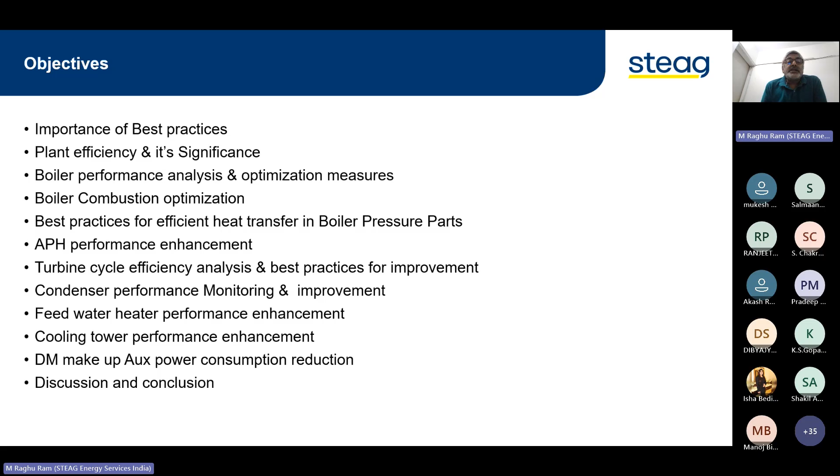So these are the main components identified for the efficiency of the power plant. So I'll take you through one by one. First, let us introduce ourselves to why we need a best practice in a power plant. You know, power plant, as already I told, is a complex system and very costly assets in the power plant.

And without having best efficiency out of each and every equipment, we will not be cost competitive. You know what is the present per megawatt installation cost? It's running around 9 crores per megawatt for a conventional thermal power plant of supercritical, ultra supercritical units. So you can imagine the fixed cost, and then the coal is also very costly.

Once we combine these two, the energy charge rate will be very high, and then even fixed cost will be very high. Unless we are cost competitive, we cannot stand in the market. The days are going to come in India where each consumer, like you and me, can source our power from the cheapest source from anywhere in any corner of India.

So that type of market is emerging slowly and slowly. So we need to be cost competitive. Otherwise, we cannot stand in the market. So this is one of the reasons to be best - cost competitiveness.

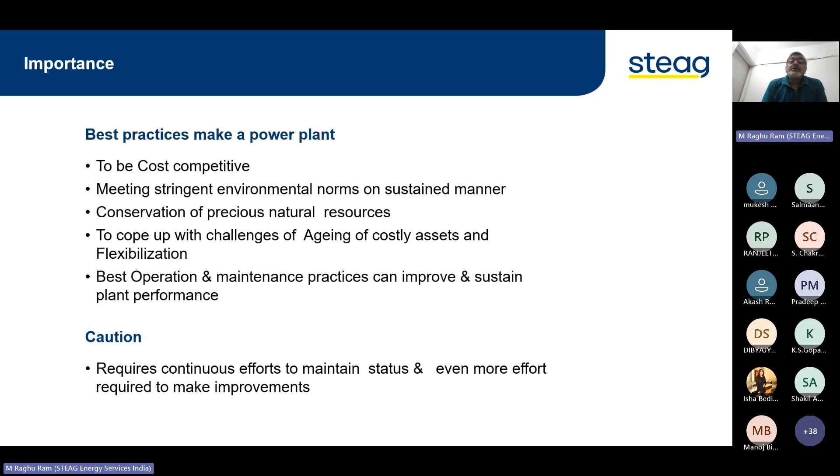What is efficiency? You all know from childhood, we are reading it is output by input. How much output we are getting for the given input.

In the power plant context, heat rate is the more predominant indicator of power plant efficiency. It is nothing but heat required in kilocalories or kilojoules to generate a kilowatt hour of power, that is, 1 unit of power. It is expressed as kilocalories per kilowatt hour or kilojoules per kilowatt hour. This is the most representative parameter of power plant efficiency.

Unit heat rate is heat input to the cycle in kilocalories, that is, fuel burned - kg of fuel burned into calorific value of the fuel - divided by power generated in kilowatt hour. This is the unit heat rate. Fuel is input at the boiler, power output is at the generator, and the entire cycle is covered.

Coming to turbine cycle heat rate, gross turbine cycle heat rate is the heat input of the turbine cycle - that is, through main steam and hot reheat, how much heat is input - and then what is the power generated at generator terminals.

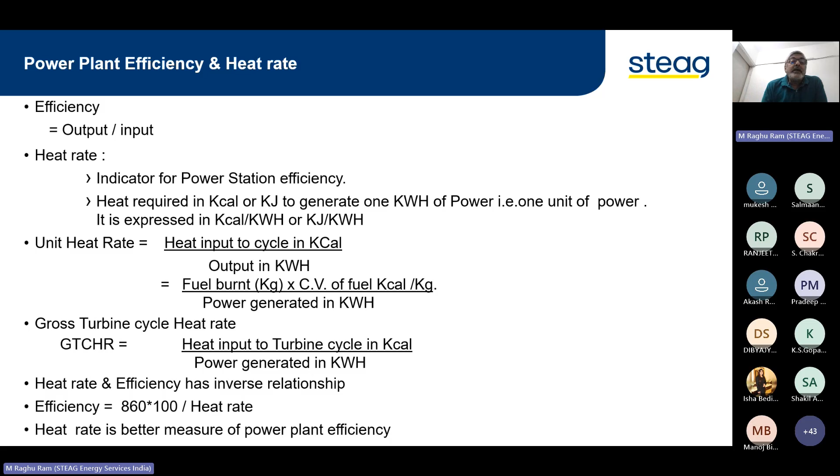Factors affecting the heat rate and efficiency of the unit include basic design aspects. It is a design feature - how the plant is designed, what parameters are set.

Take a normal conventional subcritical boiler versus supercritical technology - there is a vast difference in heat rates and efficiencies. Higher the pressure and temperature, the more efficiency we get. Nowadays materials are available so people are touching 600 plus degrees, and pressures around 285. So the design aspect also decides the basic heat rate of the power plants.

Then machine rating, as I already covered. Ambient conditions - under what conditions the plant is operating, very hot or very cold conditions, and relative humidity - these also have an influence on the efficiency or heat rate of the power plant.

Condenser vacuum and partial loading - definitely with partial loading there will be heat rate deviation, because units are designed for base load. Once you go for partial load operation, there will be deviation in the heat rate. I'm not going into the details of compensations, but partial load operation has a bearing on efficiency.

Coal quality has a direct bearing on boiler efficiency. Aging of the turbine, aging of the components. Chemistry also affects heat transfer, either in the condenser, boiler, or other heat transfer components. Chemistry has a bearing.

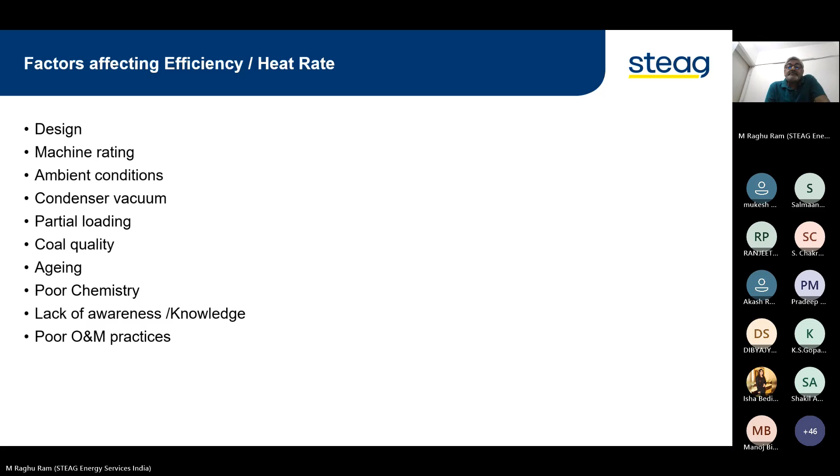Now, any parameter has to have a comparison for evaluation or gap analysis, whatever you say. So what reference values can we take for the gap analysis or comparison purpose? Either it can be design parameters or performance guarantee test parameters.

Of course, design parameters - certain parameters can be achieved, but certain ambient conditions we don't have any control over. So achieving design parameters may be a difficult task, but the best thing would be the parameters and performance achieved in the PG test. PG test is conducted in a controlled environment.

I think you must be knowing, because we do the cycle isolation, there will not be any makeup, there will not be any soot blowing. Soot blowing is done 2 to 4 hours prior to the efficiency testing. Then there will not be any de-ashing during this. So the cycle is completely isolated, and performance test is conducted.

These results, the PG test results, can be used as a comparison for the gap analysis purpose. And one more important thing for the gap analysis and awareness is the plant personnel should have the impact of deviation in the financial terms.

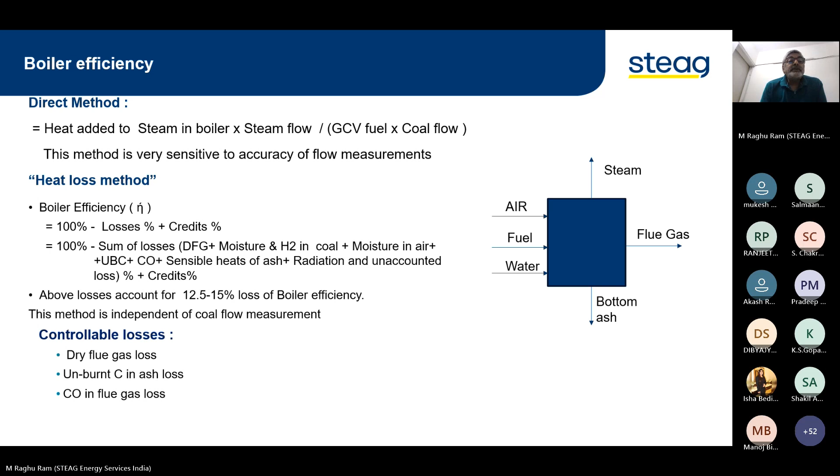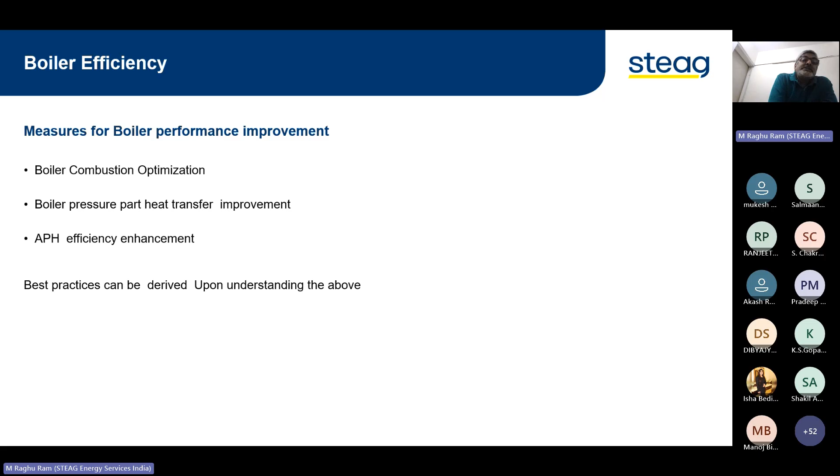Now, what are the measures we can adopt for efficiency enhancement? One is boiler combustion optimization, boiler pressure part heat transfer improvement, and air preheater efficiency enhancement. All the factors I was discussing about controllable losses are covered under these three major components.

Now, what is the calorific value? Just a few words on this. Calorific value is the heat content per unit of coal, expressed as kilocalories per kg or kilojoules per kg. Coal is a complex compound - once you burn it, it has carbon, volatile matter, moisture, and ash. Once we burn it, it releases heat, and that heat is called calorific value.

You have GCV or HHV - there are two ways we can express them. GCV, or higher heat value, gross calorific value, is the total amount of heat produced when a fuel is completely burned and the combustion products are cooled to the initial temperature of the fuel.

It means the moisture inside the coal gets evaporated, absorbing the latent heat for evaporation, and that heat is released to the net heat. Then the product is cooled and water is condensed - that is called GCV, the total higher amount of heat available for use. Whereas in low heat value, the water vapor produced during combustion is not condensed, so latent heat is lost. That is the lower heat value.

So calorific value is a necessary basic measurement for boiler efficiency calculation, and it is also required for fuel payments, coal payments - all coal payments are done based on this. You must be aware that coal is divided into several grades, G1 up to G17 in the Indian context. Bituminous and anthracite coals are all divided into G7 up to G17 grades. So the payment to coal companies depends upon the GCV of the coal.

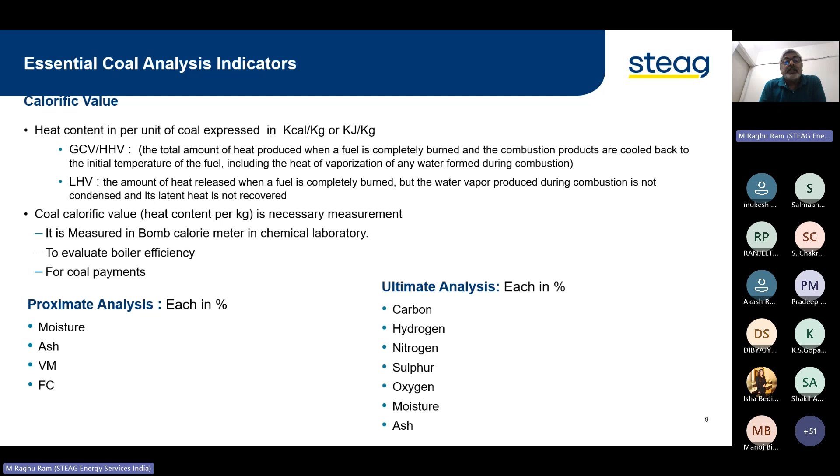But for PG test purposes - I'm repeating this, for PG test purposes - proximate analysis, the moisture, can be done in our laboratory with both parties agreeing, but ultimate analysis is done in an accredited third party laboratory to have independence, because it has a contractual obligation. It is not done through a formula. For regular, day-to-day analysis purposes, we can use that formula, which can be used for trending purposes.

So, influence of various components in boiler combustion. Volatile matter - what is its influence on combustion? The volatile matter actually limits the pulverizer outlet temperature and fineness requirement. Normally we pulverize the coal in the pulverizer, preheat this fuel and send it to the boiler. For general subbituminous coals, we keep around 80-85 degrees centigrade if VM is low. If VM is high, there is a limitation on the mill outlet temperature - it may be around 65 degrees centigrade only.

Similarly, volatile matter has influence on burner and air damper settings, ignition for combustion, and flame stability. High VM coals will have higher flame stability. Low VM coals have chances of flame failures and furnace trippings, because low VM has got low sustenance on combustion.

Then there's unburnt carbon content in fly ash, and moisture has an influence. Each moisture has two types: one is surface moisture, the external moisture in the capillaries of the coal particle, which can be easily taken out during heating. But inherent moisture is in a compounded form, which will not come out due to heating - it has to be burnt out. So these are the two types of moisture.

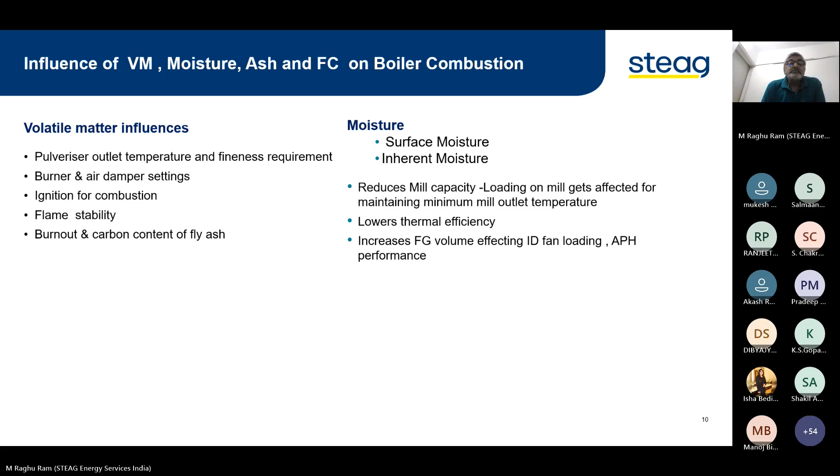Now, influence of ash. Ash is a waste product, but not in that context—ash nowadays has got a lot of uses. I'm not talking about that context; I am talking about the combustion part of it. So ash doesn't burn. Ash is the incombustible residue of combustion.

So it is a burden for us, because Indian coal has got around 40 to 44% ash. Suppose any power plant gets 10 rakes of coal, you can imagine you are carrying ash in 4 to 4.4 rakes, since it's about 40%.

So this much ash we are transporting from the mines, bringing it here, handling it, loading into the boiler, burning the coal, and then that ash comes out and we have to dispose of it. This is a sort of pain for power plant operators, because ash disposal and ash utilization is one of our prime responsibilities.

The polluter will pay—that is the motto now. We are the polluters, we have to pay for that. That means it has to be utilized, either in mines backfilling, road construction, brick manufacturing, gypsum, or various other utilities. Mines backfilling is also a use for it.

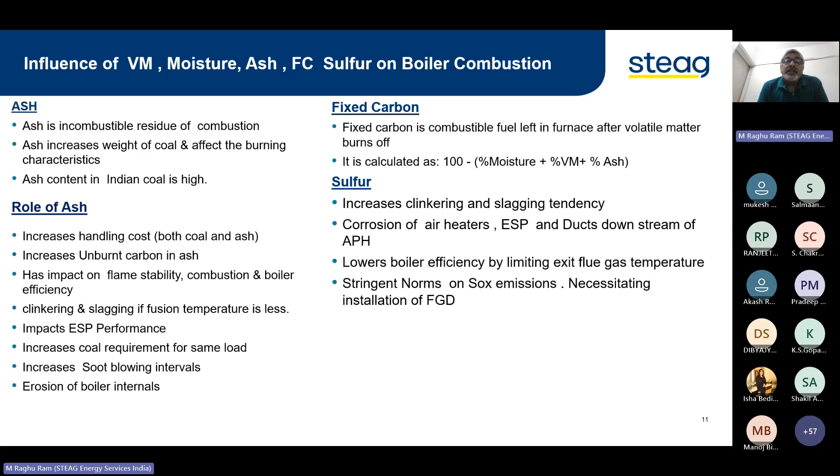Now I'll get back to the discussion. We were talking about combustion optimization and combustion efficiency. There are three major factors, the three T's of combustion: temperature, turbulence, and time. Let me spend some time on this.

Temperature is the temperature at which fuel enters the boiler, and it has to reach its self-ignition temperature to catch fire and release heat. This aids in self-sustenance of combustion. What we do is pulverize coal, remove the moisture, and carry this preheated coal to the burner, where it sprays into the furnace.

Flame is already available there. The coal particle gets heated up to ignition temperature. Meanwhile, volatile matter burns, giving further heat, and the coal particle catches fire and starts burning, cooling off after completion of combustion. This is the temperature of the fuel entering the boiler, the ignition temperature. Then comes turbulence.

Each coal particle, after catching fire, has its surface covered with products of combustion. These products of combustion cool off or prevent fresh particle exposure to the flame. So bad combustion takes place, and we lose unburned carbon in the bottom ash and fly ash.

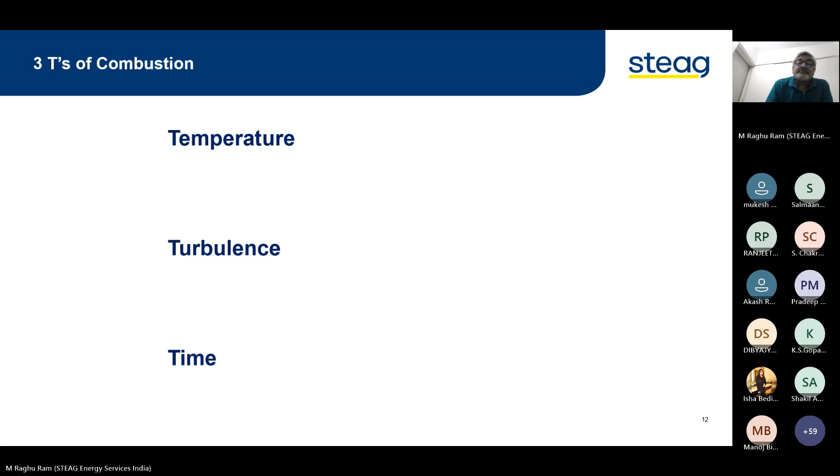I'll just touch upon the coal burning profile. It shows the temperature at which volatile ignition sets in, the combustion of volatile matter. As I told you, once coal plus air enters the furnace around 85 to 90 degrees centigrade, depending on conditions, it starts picking up heat inside the furnace for the prevailing flame conditions, and the temperature reaches over 200.

Then it starts burning, which is called combustion of volatile matter setting in. Next is the ignition temperature, where ignition of char takes place, meaning coal particles start burning. PT is the peak temperature where the rate of heat release is maximum due to char combustion.

BT is the burnout temperature, where burning of coal is complete and exothermic heat release becomes zero, meaning nothing is left in the char particle. These temperatures give an indication of possible delayed combustion. If you see this profile, it will indicate the possible delayed combustion behavior of the type of coal. This is a very important aspect to consider.

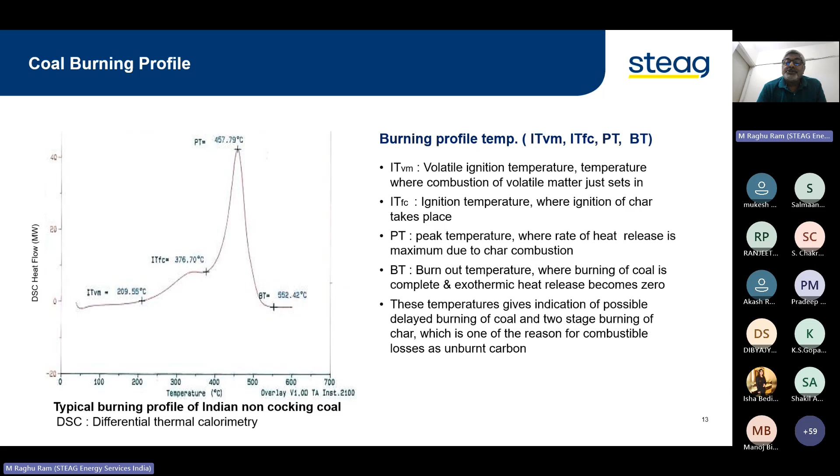If you want to use a boiler with different types of coal together, you don't have much choice unless the burning profiles are almost similar. These profiles have to be compared, and then the coal can be used as a blended product.

So these things are important: the profile has to be understood and analyzed. Different coals having similar profiles will be best compatible for blending purposes.

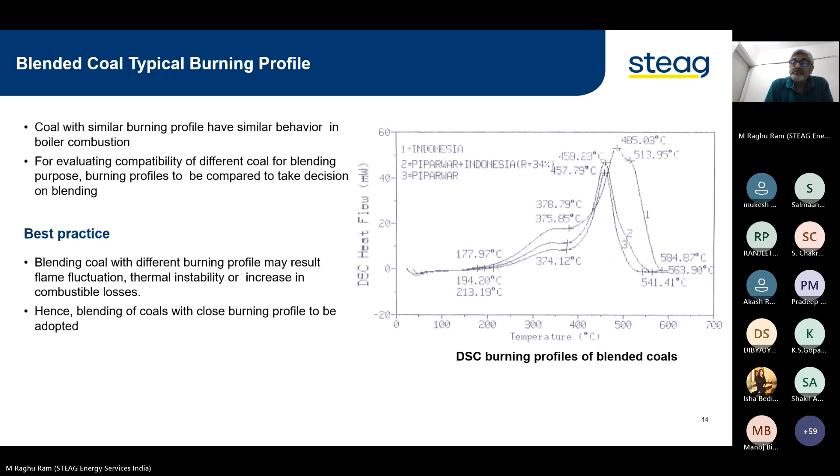So my entire discussion on combustion optimization revolves around three components: time, turbulence, and temperature. These three components we will be concentrating on in one form or other. So what is the influence of coal fineness on combustion optimization?

And higher combustion efficiency we can achieve because particle size is so small that it burns rapidly and completely, so we can reduce the unburnt carbon in ash.

Then higher heat release per unit mass, fast response to load changes, because pulverized fuel boilers compared to- I can just touch upon the CFBC boiler here. The CFBC boiler response time for load fluctuation is a little slow compared to pulverized fuel boilers. No doubt, CFBC may have better stability under similar conditions, but for load response, the ramp rates, it is very difficult to achieve the nowadays recommended 2 to 3% ramp rate in a CFBC boiler because of the intense heat stored in the refractories and the bed material. The response is very slow. But in pulverized fuel boilers, it is faster.

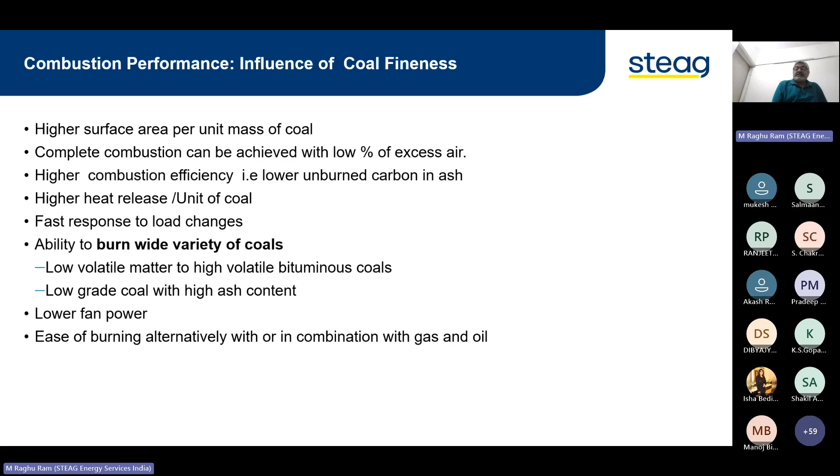It can be easily burnt because of pulverization, along with oil or gas, in combination with oil and gas.

Then we must be talking about excess air, stoichiometric air. We will touch upon these two aspects. The theoretical air required for complete combustion of fuel is stoichiometric air. The stoichiometric air allows the complete combustion of the fuel particle.

However, for complete combustion, we may have to require a little more air because of the prevailing conditions and different deviations in the boiler. So complete combustion avoids carbon conversion to carbon monoxide- it will not allow the formation of carbon monoxide, and hydrogen converts to water. The theoretical equation shows 2.67 kg of carbon plus 8 kg of hydrogen and 1 kg of sulfur and the oxygen available in the fuel.

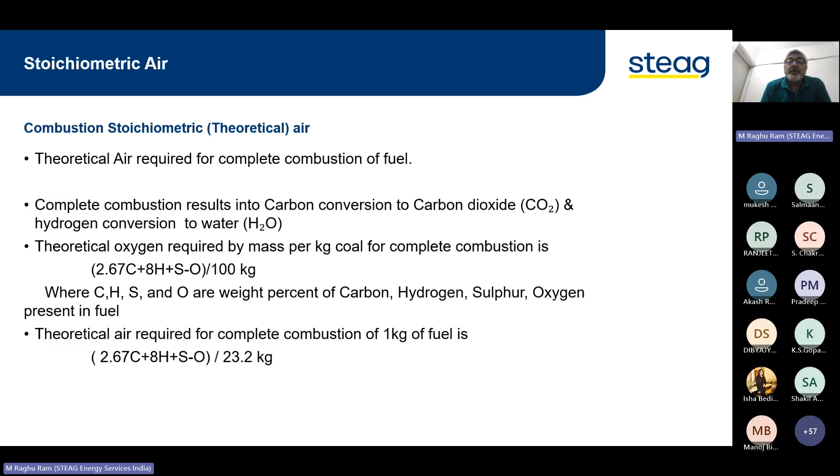This is the stoichiometric airflow equation. Theoretical air required will be- because oxygen by weight is 23.2% in the air, so the theoretical requirement is divided by 23.2. Stoichiometric air is required for complete combustion.

However, under practical situations, additional air is required for completing the combustion, because of reasons like lack of perfect mixing between fuel and air, fluctuations in fuel flow- since coal plus air is not a homogeneous mixture going through the coal pipes, it is a heterogeneous mixture, so there could be some variation in fuel flow and variation in calorific value of coal. Nowadays we say this particular mine has this calorific value, but each bed has got a different calorific value, so there will be changes in calorific value because of its heterogeneity.

And one aspect I would like to stress is, as per classical thermodynamics- Van Wylen, you can refer to that textbook, Classical Thermodynamics by Van Wylen. In that book, the combustion equations are elaborately discussed, along with the stoichiometric air requirement and excess air requirement, and the influence of excess air requirement is elaborately discussed.

If we burn fuel with the correct stoichiometric ratio under very controlled conditions, the temperatures achieved are very, very high compared to what we achieve in the boiler.

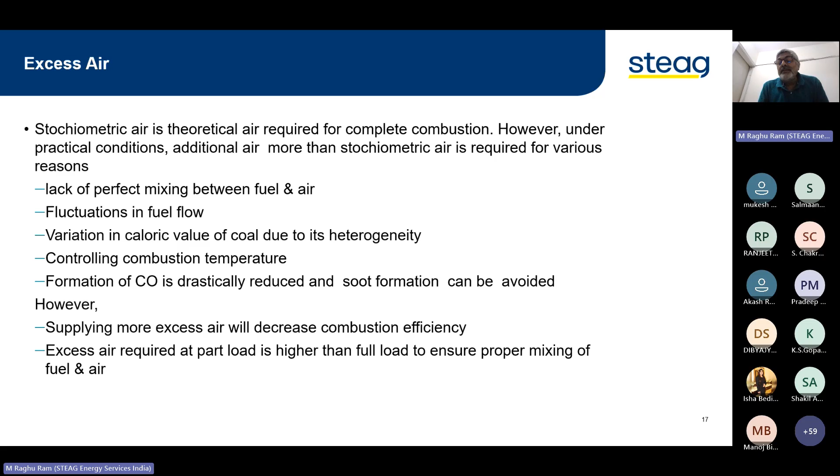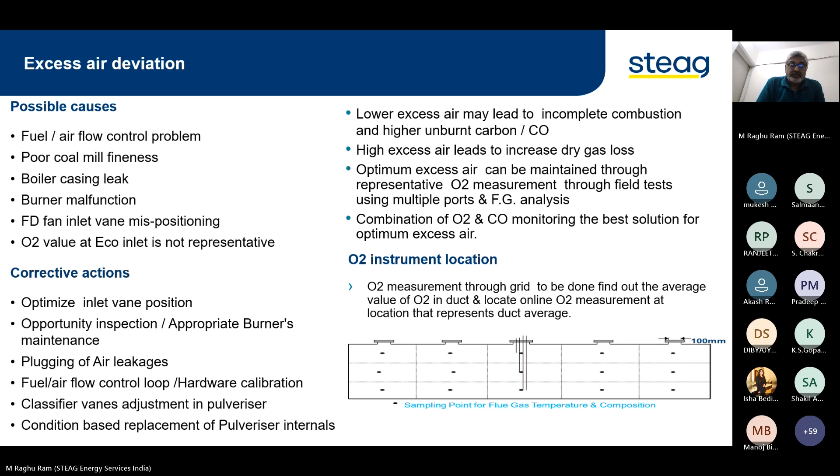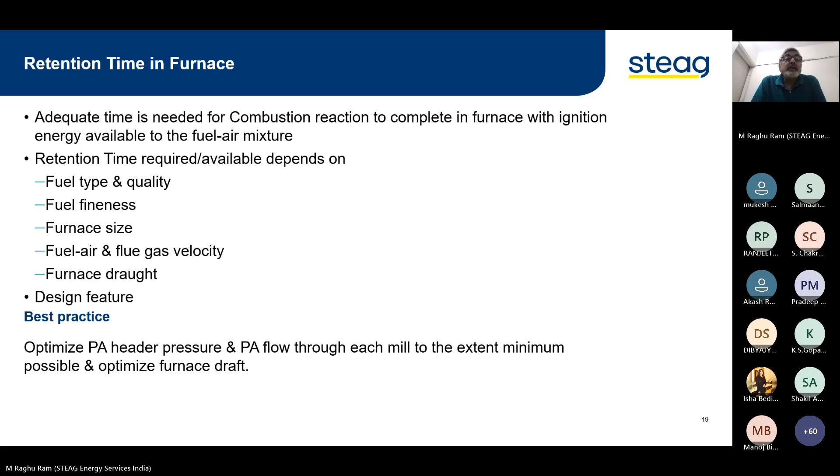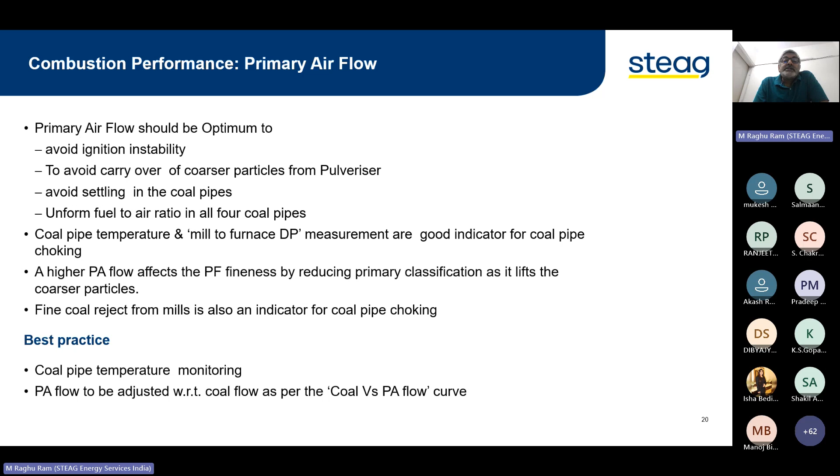PA flow to be adjusted, coal flow as per the coal versus PA flow curve. This is a manufacturer's curve. According to that, we need to adjust the PA flow.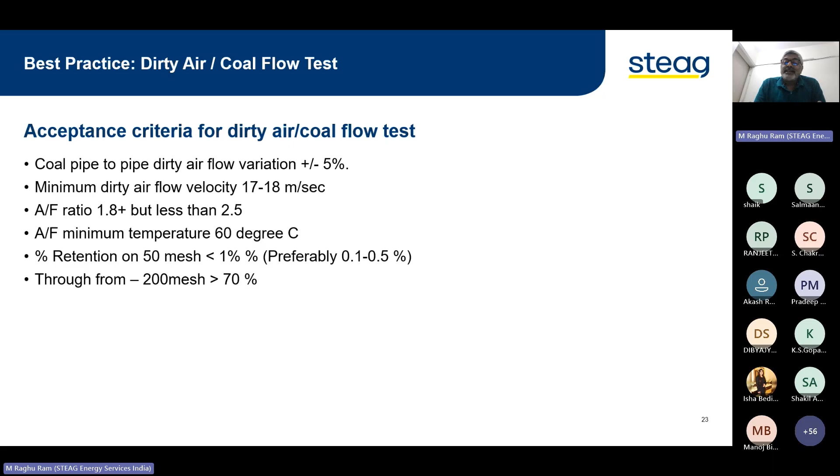As I told you initially, this is a continuous effort. Just theory cannot bring the best practices. Best practice can only be told, but it has to be implemented by you people, and it's a continuous effort. Day in, day out, you have to practice all this.

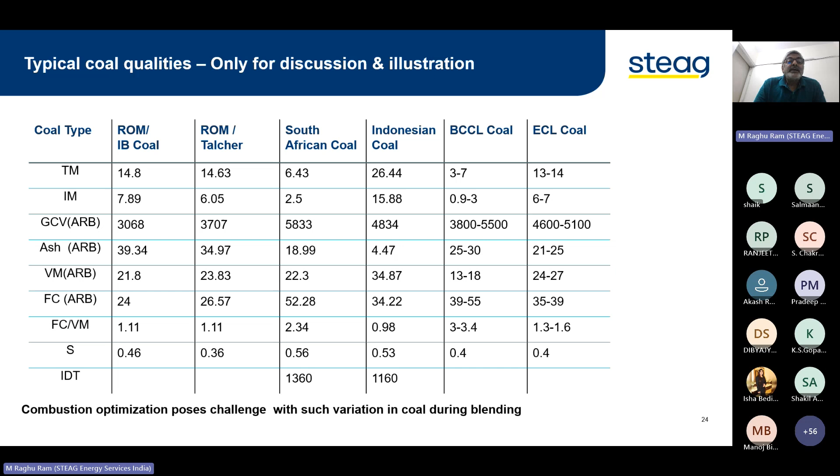This is a typical Indian coal and South African coal, just for comparison purpose, no bearing on that. You can see total moisture variation, total inherent moisture variation, GCV variation. So if you want to do some blending activity, you have to optimize. Suppose you are getting very poor coal, then you can select for a blending option also.

Now, best practices for burning different coals for optimum combustion. We have to maintain the mill exit temperature through cold air damper, 80 to 85 degrees for normal coal, as low as 65 degrees for high VM coal.

Fineness as already discussed. Coal fineness sampling, generally power plants do it with cyclone. However, if you can procure an isokinetic sampling probe, it's not that costly compared to this. I don't have a ready value with me to tell you, but you can procure one. Once you procure an isokinetic sampler and do the sampling through isokinetic sampling, the results are best.

You can come to a reliable conclusion, because cyclone sampler sometimes gives different values which we cannot conclude much from. We will get confused unnecessarily. So it's better to use an isokinetic sampler, and coal sampling through isokinetic sampling should be done.

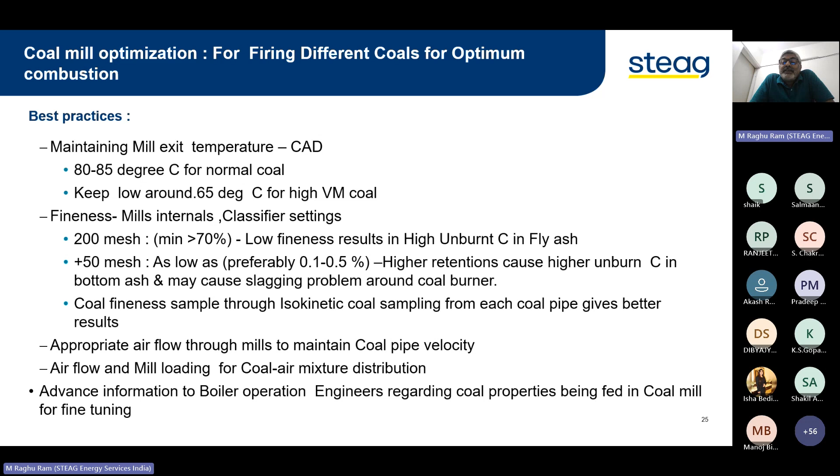Such type of communication will also help the boiler engineers optimize the parameters, but generally it doesn't happen. After so many years of experience, we try to, but generally people don't bother to inform the control room people about this. Try to practice this; it will give good results.

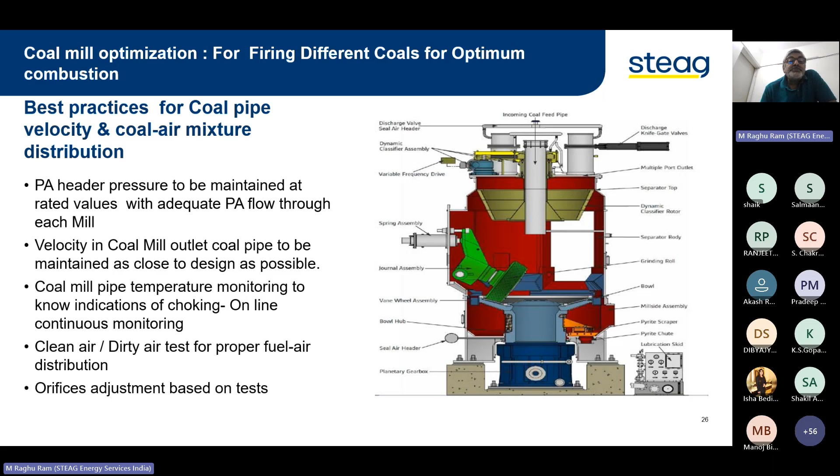This, I think, we discussed coal mill pipe temperature once again. Orifices adjustments can be done based on the conditions.

SADC - combustion optimization for firing different types of coals is optimization of SADC. General practical values I am sharing with you: if volatile matter is less than 20%, fuel air damper opening can be reduced to 10 to 15%. For high VM coal, fuel air damper opening can be 30 to 35%. Auxiliary dampers to be kept open at 50%.

Overfire dampers based on the NOx values. Furnace to windbox DP, generally recommended by the manufacturer, has to be judiciously maintained because it has a lot of bearing on the combustion.

If you do not maintain the furnace to windbox DP, what generally happens over a period of operation is, due to various leakages, dampers are not in correct position. Outside you see dampers at 30%, but inside it may either be wide open or fully closed. All sorts of things will happen in running units.

So if you don't maintain the furnace to windbox DP, flame containment in the boiler will be disturbed. If furnace to windbox DP is very low, the flame is enlarged, overheating of the tubes may also take place. If it is too high, it may disturb the flame stability.

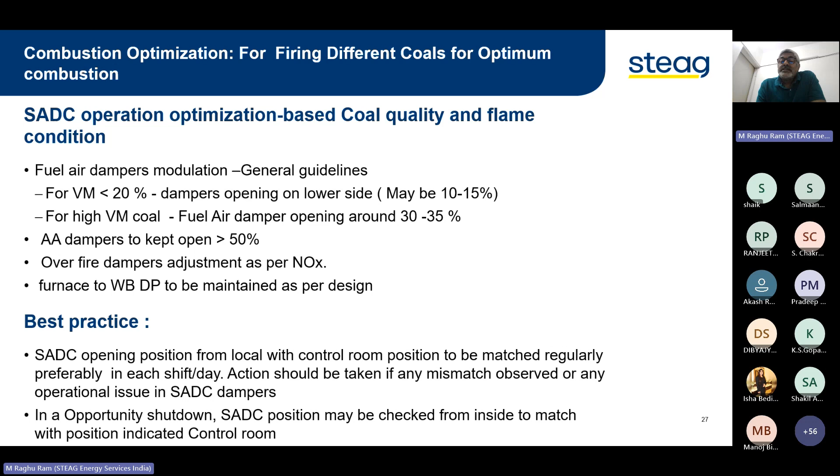During opportunity, from inside the furnace, you have to check the secondary dampers' position, matching it with the control room as well as the opening position as per the command. This will ensure stable combustion conditions and correct airflow admixture.

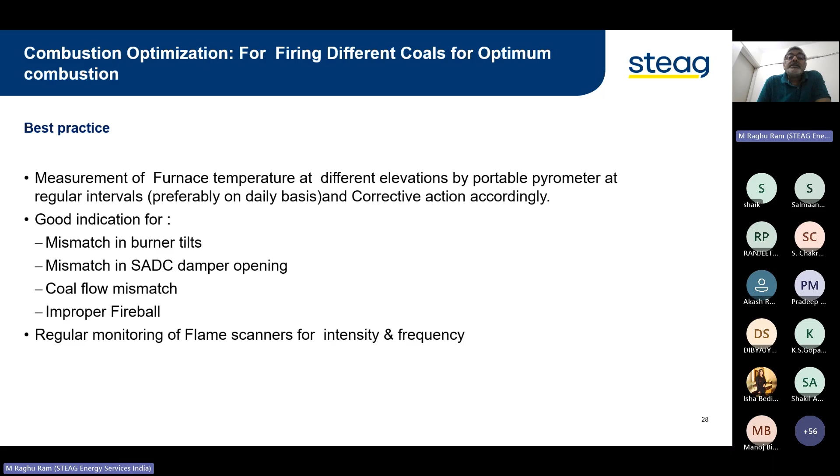This is what we have discussed. Now, as I was touching upon coal blending, this can be adopted, though we cannot really call it blending. Basically, blending is a homogeneous mixture, but it is not possible to do blending to that extent. What we can do is have good mixing - though we call it blending, it's good mixing. So for selection of coal for blending, if your coal is poor, you need to select fuel for blending which has a similar burning profile and similar characteristics. That will give you good mixing and better results.

I think somebody has a question. We will discuss this in the break. You can lower your hand, my dear friend, we will discuss it.

Blending can be done through mixing using a stacker reclaimer, or by having higher quality coal in two or three bunkers - that is also possible. So reclaim hoppers, some plants will have reclaim hoppers, and that also can be used.

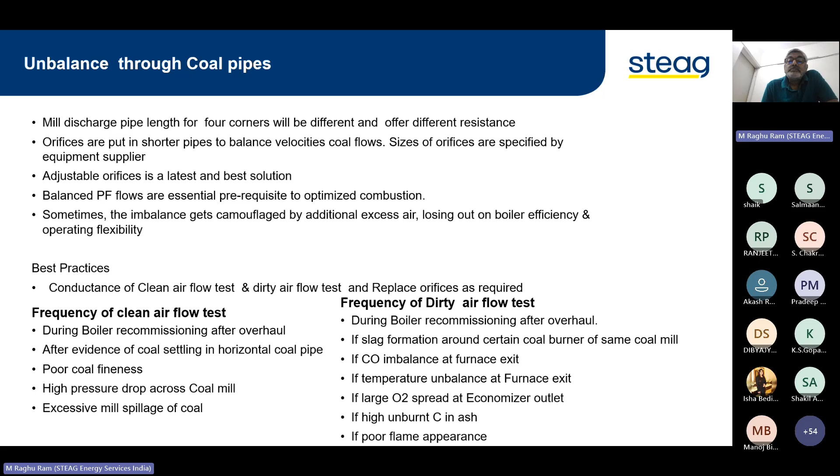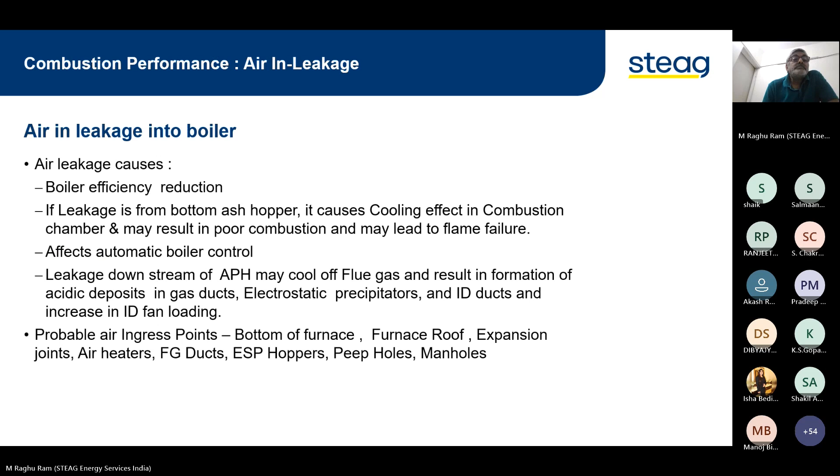So this slide we discussed. I think some people are joining very late. Anyhow, let's move to efficient heat transfer in boiler pressure parts.

Now we were discussing the combustion optimization aspects. If combustion is good but heat transfer is bad, then also the results are the same - we don't get the desired results.

So the subsequent heat transfer surfaces start picking up the heat - that is also an indicator. Then higher economizer outlet temperature is also a good indicator for poor heat transfer in the furnace.

If heat transfer takes place in the water walls, you get maximum steam generation for lesser coal. Heat transfer has to be absorbed in the water wall; the rest is dry steam that goes into the superheater and reheater sections, where flue gas convective heat transfer helps. But if heat transfer is poor, these are the indicators.

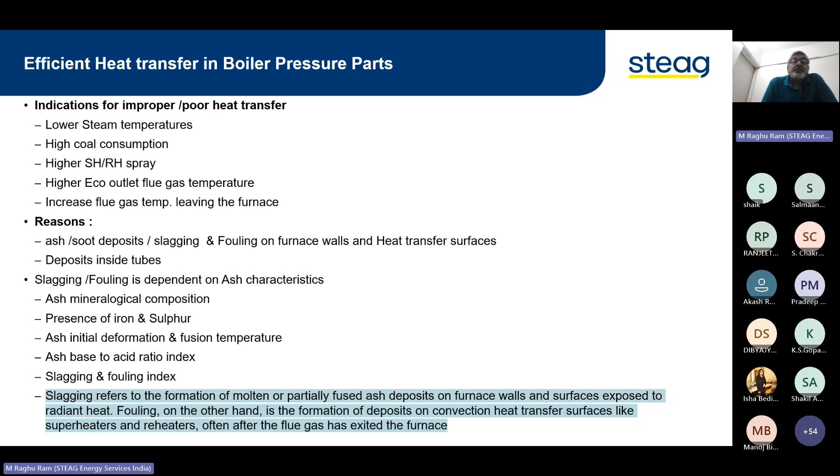This is the basic distinction, but both have the same effect - they inhibit heat transfer. So it's only for theoretical purposes that I wrote it down this way. Our aim is to avoid slagging and deposits or fusions.

Let us understand a little bit about ash fusion temperatures, initial deformation and fusion temperatures. The initial deformation temperature is the temperature at which ash starts softening, marking onset of melting just before it starts softening. If IDT is greater than the temperature in the furnace, what happens?

The ash particles will be dry, so they will not melt or soften. They bounce back into the flue gas stream and can be removed by soot blowing. When IDT is less than the temperature in the furnace, ash softens and sticks to the furnace walls, which starts inhibiting heat transfer.

Ash fusion temperature is the temperature at which ash produced from burning coal or other solid fuels starts softening and melting. Ash fusion temperature depends on composition of ash and is increased by presence of higher silica and higher aluminum oxide. So that will be high, which is good.

But with high ash fusion temperature, ash released into the furnace will cool quickly and will not stick to the furnace walls. Whereas low ash fusion temperature results in ash remaining in molten state, causing potential deposition on the furnace walls.

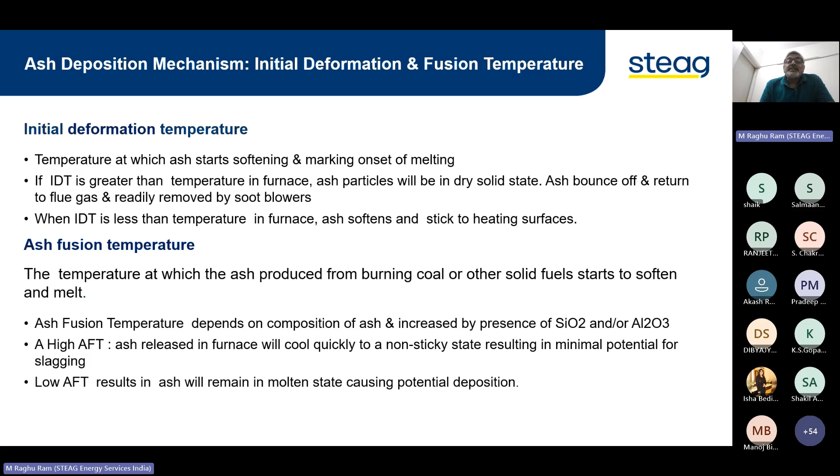Though ash characteristics and boiler design are both important factors for slagging and fouling, some operating parameters will also control this, like air distribution, fuel distribution, coal fineness, excess air. These also influence to some extent.

Air and fuel less than theoretical in some burners will give high temperature zones and localized reducing conditions, aggravating slagging formations. Whereas high coal air ratio delays combustion and upsets heat distribution, resulting in elevated temperatures in the upper furnace and leading to secondary combustion.

Long burnout times increase the potential of burning particles to contact furnace walls and heat transfer surfaces. So these are the parameters that also influence to some extent, which we can control.

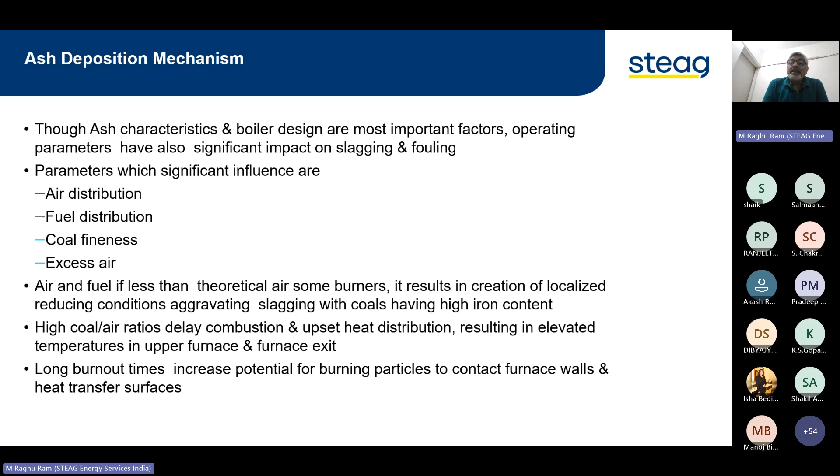How to minimize this, best practices? You can say burner adjustments to avoid flame impingement on the walls, direct hitting on the furnace walls. It can be done by burner adjustments, coal flow balancing in each corner, maintaining furnace to windbox DP, which I was discussing earlier, and maintaining pulverizer fineness.

Low fineness may cause delayed combustion because particle size is more, it takes more time to burn, longer residence times, and may cause slagging in the lower furnace. Maintain excess air to minimize conditions conducive for formation of localized reducing conditions in the furnace.

Cold air velocity tests can be done for proper velocity distribution across the boiler. Sometimes during operation you may observe big lumps falling inside the bottom ash hopper, with a lot of noise. That means clinker formation. Clinker is a bad word to use, but large lumps are getting formed.

In that condition, you can go for split mill combination. You have to break the mill, split the mill. If you use that, it can be avoided to some extent. And soot blowing is a must, the best technique for dislodging deposits and improving heat transfer.

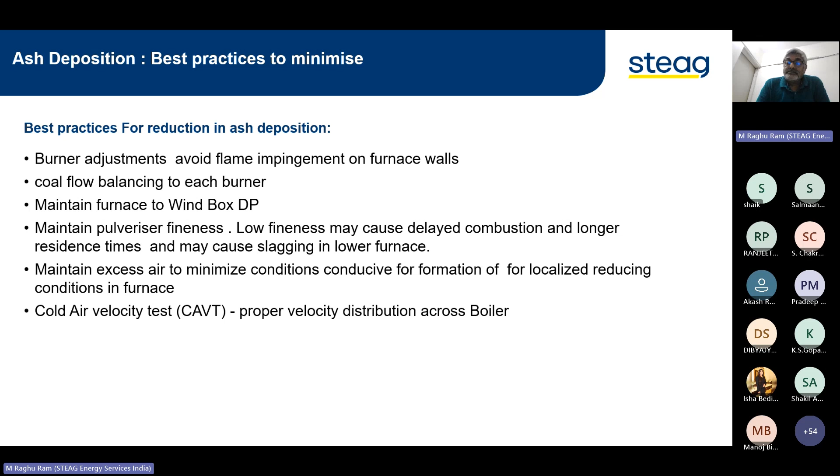Generally, soot blowing has to be done at regular intervals. It's a preventive measure for deposition sticking to the furnace. It has to be removed, and it can only be removed through soot blowing. That is the only technique you have during operation.

Wall soot blowers, LRSBs, HRSBs are to be operated as per predetermined frequency depending upon experience. Wall soot blowers can be operated every day. If slagging is not there, you can operate once. Even small soot deposition on the furnace walls will also inhibit heat transfer, so once a day is the minimum recommended.

LRSB, generally 2 or 3 LRSBs, depending upon the temperature gain in the reheater or superheater and depending upon conditions, you operate the LRSBs based on experience, practical observations, and optimization.

And you can clean the boiler with jet cleaning, which every plant does during overhauling. Build the scaffolding and do the jet cleaning with high pressure jet to dislodge all the depositions from the furnace surfaces, platen superheater, and radiant roof assemblies during the overhauls.

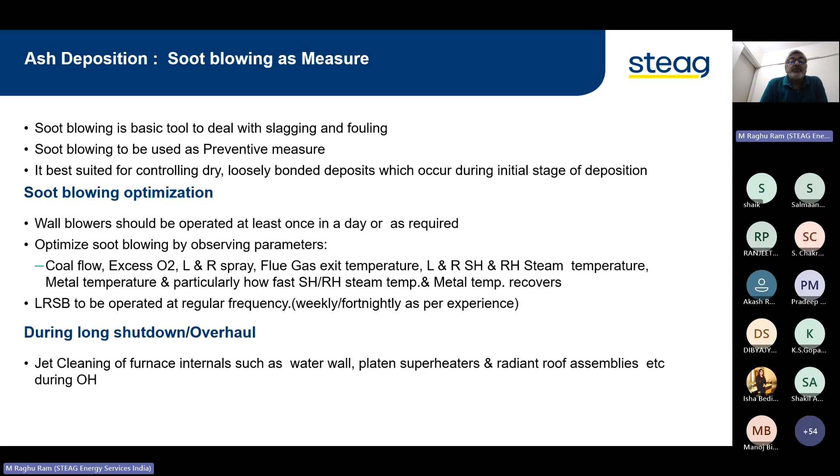Now, sir, the break time is I think 4 o'clock. So I think I did not even finish half. Okay, sure, can we break after 5 minutes? I'll discuss this air preheater and yeah. Okay.

Yeah, of course this is a basic component. Everybody talks about air preheater performance, and during overhaul it is a major component which is either cleaned or the basket is replaced, with seal adjustment. It is, you can say, very much the heart of boiler efficiency.

As per thumb rule, if the exit flue gas temperature is 20 degrees high, you will lose 1% boiler efficiency. You can calculate yourself the 1% boiler efficiency loss. It runs into crores.

So the performance indicators are air preheater seal leakage, which can be found out from measurement of O2 before air preheater, O2 after air preheater, and gas side efficiency, X ratio. These are the parameters which are calculated, and DP across air preheater, which can be seen directly in the boiler DCS.

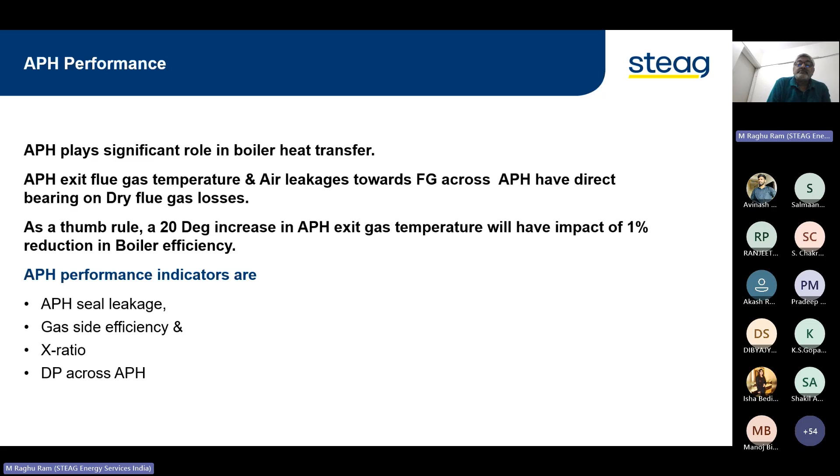Gas side efficiency indicates how effectively the air preheater transfers heat from the flue gas to the combustion air. Higher gas side efficiency means heat is recovered from the flue gas, maximum heat is recovered. Lower means heat transfer is poor, and it indicates internal conditions of the air preheater.

The definition: it is calculated as flue gas inlet temperature to the air preheater minus flue gas outlet temperature, divided by flue gas inlet temperature minus air temperature. That means the maximum allowable margin available on the denominator side, versus on the numerator side what is the actual gain. This way gas side efficiency is calculated.

Deterioration of gas side efficiency indicates change in air or gas flow rate through the air preheater, fouling on heat transfer surfaces, long-term corrosion of air heater heat transfer surfaces because of high SOx content, or condensation at the cooler zones of the air preheaters.

Best practices are to use soot blowing as a technique for the air preheater, regularly during the shift. During startup, vigorously use soot blowing every 2 hours, and during normal operation of the unit, every shift you should do the soot blowing of the air preheater.

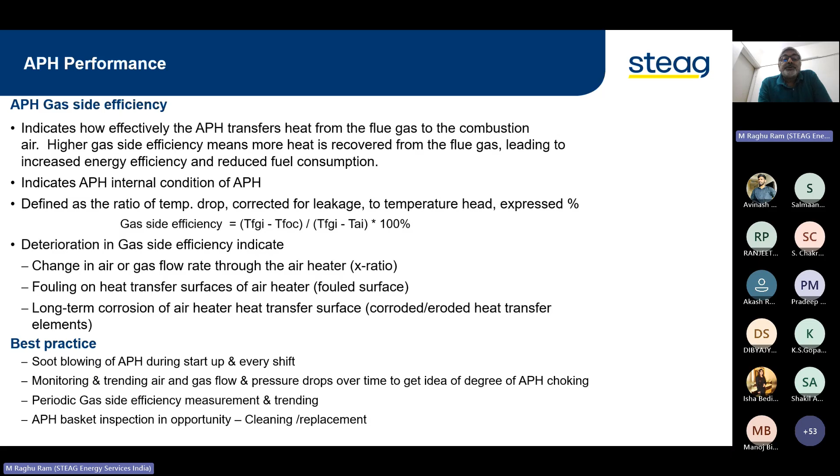So regarding seal leakage - if seals are bad, what happens? Flue gas is at lesser pressure, secondary air and primary air at higher pressure. There will be infiltration of secondary air and primary air into the flue gas side. Once it happens, you are losing the quantum of air because of the infiltration, and flue gas at exit of air preheater gets cooled off.

However, if corrected air flue gas temperature is used, it will be much higher if leakage is nullified. So the seal adjustment or seal perfectness is most important in air preheater performance.

Nowadays online adjustment is available. If it is commissioned, use it and adjust the air preheater seals so that air ingress across the ducts - that means SA to flue gas, PA to flue gas - is as minimal as possible.

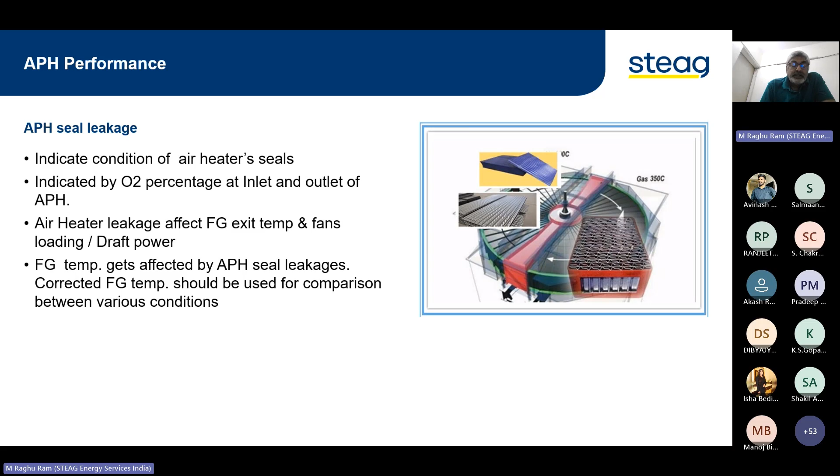This is air leakage calculation. You can use carbon dioxide, or O2 at inlet and outlet, and formulas are indicated. You must be people are well aware of these things. But if air leakage is there, air preheater performance deteriorates.

Boiler efficiency starts falling drastically because the leakage increases the exit flue gas flow - that mass flow of the flue gas is more. ESP performance deteriorates, ID fan loading increases, and it has an entire bearing on the draft system. Draft system is affected. So the seal leakage needs to be taken care of appropriately with adequate maintenance interventions, proper operator monitoring, and efficiency monitoring by the efficiency department.

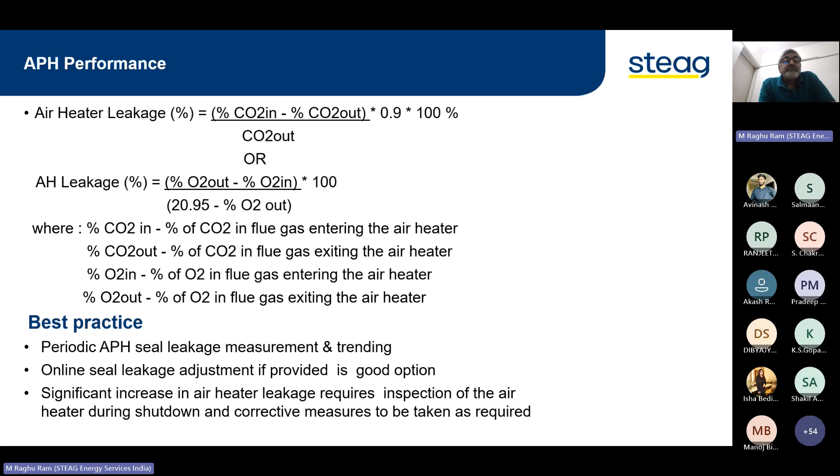So we discussed X ratio. A lower X ratio - X ratio is a parameter representing the proportion of heat transferred from hot flue gas to incoming air. This is a dimensionless parameter which indicates how best heat is transferred from flue gas to the air, which depends on moisture and air leaks.

If air infiltration is more, it will be affected - air and gas flow rates. Lower X ratio indicates airflow is bypassing the air preheater.

That means, suppose coal has got lower moisture, so mill outlet temperature is high. So for controlling the mill outlet temperature, you need more colder air. So some part of the primary air bypasses the air preheater and directly enters the mill and goes to the furnace - this is what we call tempering air. So that also has a bearing on the X ratio.

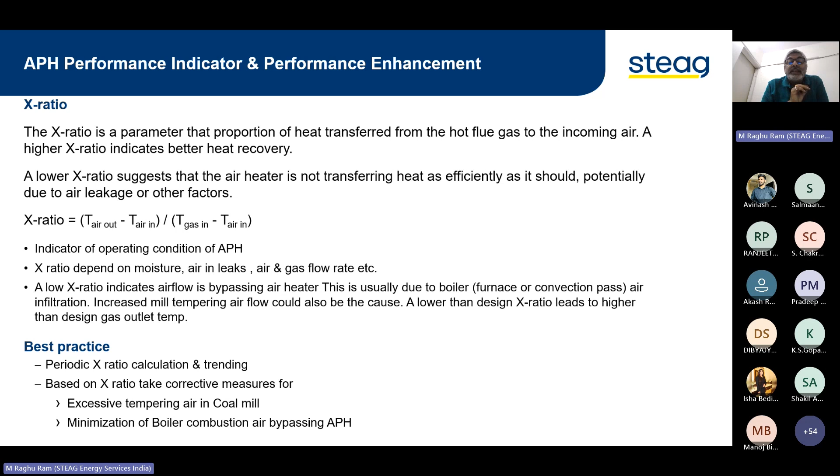If it is bypassing the air preheater, relatively colder air is going to the furnace. Best practices are: you monitor the X ratio and gas side efficiency through the efficiency department and take corrective actions as needed. Based on X ratio, tempering air can be optimized, minimizing air bypassing the air preheater. Actually, any air entering the boiler, other than primary air, should enter through the air preheater - secondary air should enter through the air preheater. If air leaks are there, it is bypassing the furnace air preheater.

Somebody asked about the credits. Credits is nothing but, now we are calculating the boiler efficiency through the loss method - 100 minus losses. But there are certain energized inputs going into the boiler, like air pressurized in the secondary air and primary air sent into the furnace with energy input from the fans. That has to be counted as added energy input to the boiler, other than coal. Coal is also energy input. Similarly, mills also put in some energy into the coal, which is also energy input into the boiler, so that credit has to be added. So the total input going into the boiler, and what are the losses - the difference between these two we should account. Of course, for practical day-to-day purposes, somebody may omit the components of credit, but for PG test purposes, credits are added.

Somebody asked how windbox DP affects the flame length. Basically this is the flame containment I was talking about. Suppose furnace to windbox DP is low, then flame enlargement takes place. If it is too high, flame disturbance takes place because of high pressure air impinging into the flame. So for a design furnace to windbox pressure, the flame profile is determined and pre-decided. But any disturbance to these things will disturb the flame ball inside the furnace.

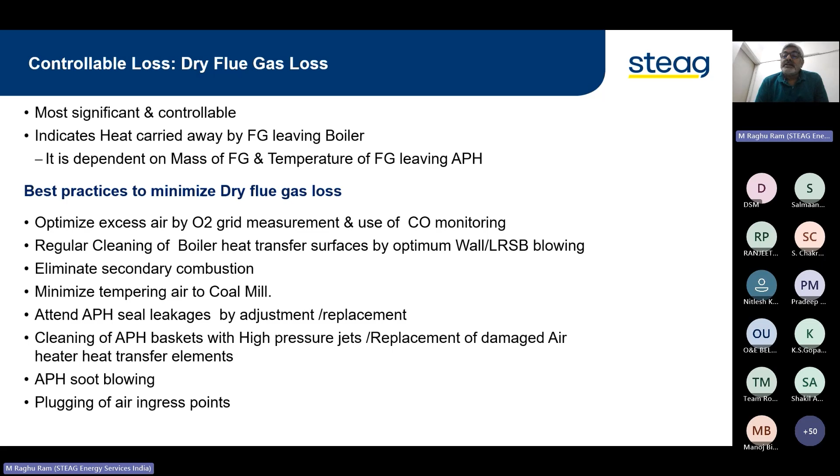Is there in Thyssen CFBC cold cyclone boiler bed material back shifting observed? Sir, I think let us reserve this question. Sometime I will try to take up the CFBC class some other time, because it is purely related to the operational aspect of CFBC, which is not the right thing to be discussed here. We will discuss sometime later - I will take up a session on CFBC operations that you can participate in. If any possibility is there, I will note down this thing and revert back to you.